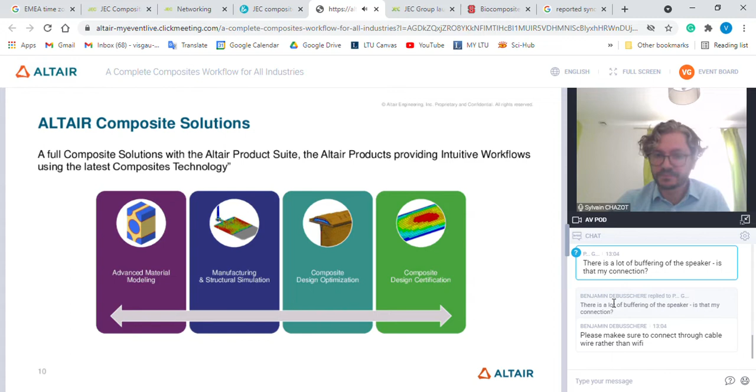We offer a full solution, and that will be detailed during the presentation of our VP, just after my talk, to show you how we can help you to be more efficient in composite design and composite simulation. And finally, just before introducing the first speaker, we have our own full complete solution for composite design.

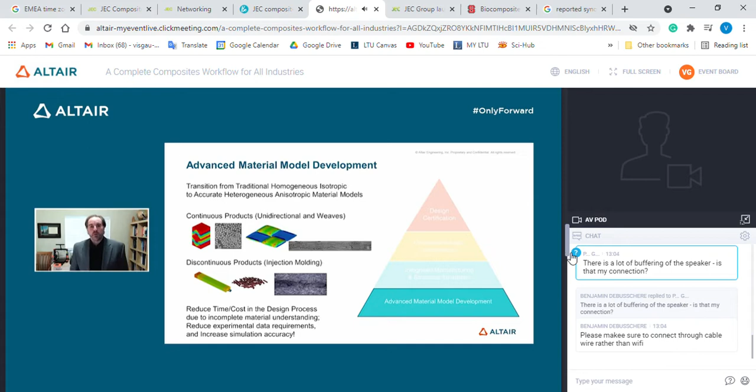So in the advanced material model development block, it's really all about transitioning from a homogeneous isotropic world to a heterogeneous anisotropic world, and really becoming as comfortable with heterogeneous anisotropic material models as we are with homogeneous isotropic material models. And we're focusing on three main product forms right now. In the continuous reinforced product world, mostly on unidirectional and woven product forms.

So within those two product forms, the unique capability is actually the ability to bridge the scales from the homogeneous ply level to the constituent fiber and matrix level, and the ability to do that computationally efficiently and to obtain results at the constituent fiber and matrix level such that we can obtain significantly more accurate material models.

Same thing in the discontinuous reinforced product world, which really is focusing on the reinforced injection molded material world, where we're doing the same thing, where we're describing the heterogeneous anisotropic nature of these materials, characterizing that heterogeneous anisotropic nature, and accurately and computationally efficiently developing material models to describe all of that for you.

So at the end of the day, it's all about reducing the time and cost in the design process due to incomplete material understanding, or not even incomplete, an inability to highly accurately model these materials, and bringing that to the forefront. It's also about reducing the amount of experimental data required to build these models, not necessarily bringing that to zero, but absolutely reducing what's required in order to develop these highly accurate material models. And of course, being able to increase simulation accuracy while we're doing all that and maintaining computational efficiency.

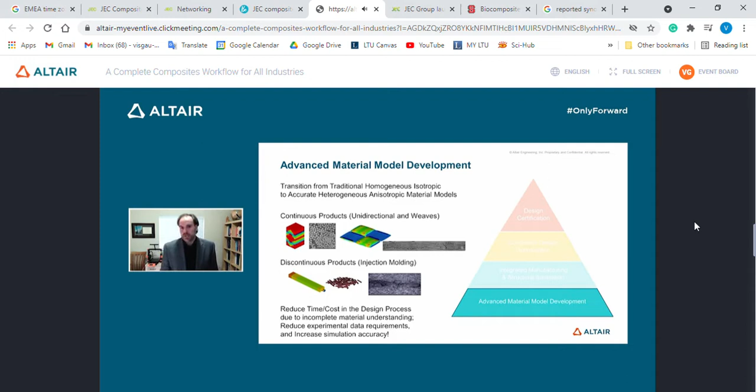The principal product that we're using inside of the advanced material model development block is what we call Altair Multiscale Designer. What's really unique about this product is that it allows for the exact same material models to be used within all commercial solvers, implicit and explicit solvers included. And of course, it's very tightly integrated into our own solvers, OptiStruct and Radioss.

But the exact same material models are also available in other commercially available solvers out there. It is indeed exactly the same material model and exactly the same code. We are using that through the user material capabilities of all of the codes, which is quite a nice thing to be able to do.

When we're talking about integrated manufacturing and structural simulation, again, it's all about being able to efficiently build these structural simulation models while we're bringing information from the manufacturing simulation into that structural simulation in order to improve our predictive accuracy of these structural simulation models. Three main areas that we're focused on. So in the area of traditional or automated layup and infusion methods, we're working on integrating draping simulations for obtaining fiber orientations and/or residuals into the structural simulation very quickly and efficiently.

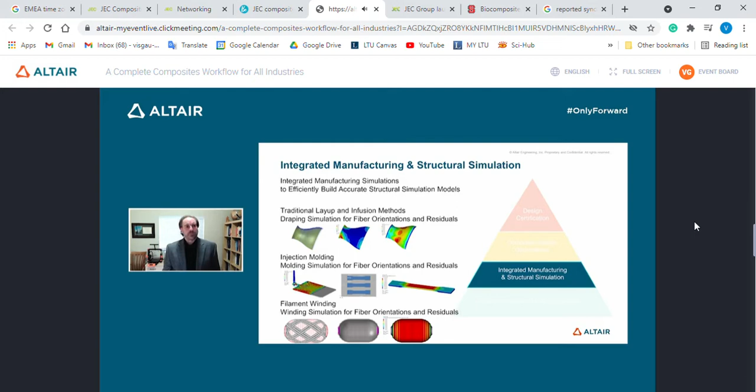A good example of a complete workflow in the integrated manufacturing and structural simulation world is the Altair injection molding solution workflow. It involves three main pieces. So we have just released Inspire Mold, which is a fantastic molding simulation product. It allows you to do your fill, your pack, and your cool simulations. In addition to all that, you can get your fiber orientations after you do a filling simulation.

Multiscale Designer is used in concert with the molding simulation to develop a heterogeneous anisotropic material model for that particular reinforced injection molded material. And then we bring both of those pieces of information together into the pre- and post-processing world, which is HyperMesh and HyperView.

HyperMesh, where we build the structural simulation model, HyperView, where we're post processing that particular structural simulation model, and of course we're using OptiStruct in order to perform the solution, whether it's a solution of a warping simulation or whether it's a strength simulation, including warp residuals in that strength simulation for ultimate load carrying capability.

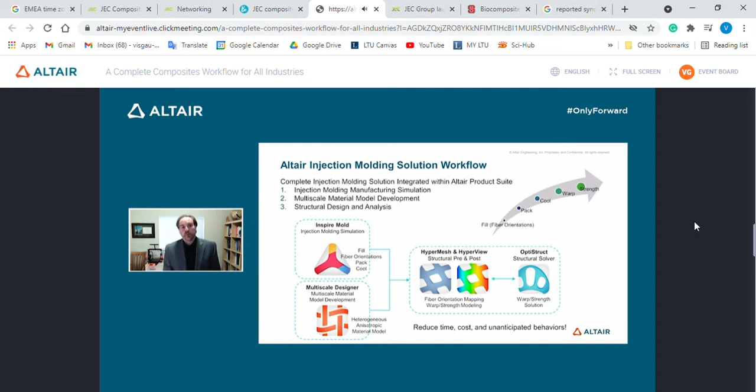So it is quite an advanced, wholly contained... I think what's really unique about this particular solution workflow is that it's wholly contained all the way from the beginning to the end within the Altair product suite. Really solving the interoperability problem that you might have to go through if you were going to a la carte the pieces of this together from other commercially available offerings. Okay.

Going into composite design optimization. So again, using traditional capabilities in the concept design optimization world, namely topology optimization, which is going to give us in the composite design optimization world our part shape. We're using that exact same technology to really tell us what should the part shape be. But we need to go a little further with composites.

So once we know that we have a certain part shape, we can make up that part shape with any number of composite plies in any number of orientations and thicknesses that we need. And so we've extended our optimization capabilities into two primary technologies. The first one in the composite concept design optimization world, which is called composite free size optimization. And that technology is really focused on trying to describe what are the most efficient ply shapes.

You're going to see here I have a slide that shows that, just like topology is synthesizing a structure, we're actually synthesizing ply shapes that make up that structure with that particular concept design optimization technology. Once you've kind of interpreted your concepts, then we can get into the detailed composite design optimization phase. And there we're talking about a technology called composite size and shape optimization. It's equivalent to the size and shape optimization. We just put the word composite on front because we're talking about sizing ply shapes now.

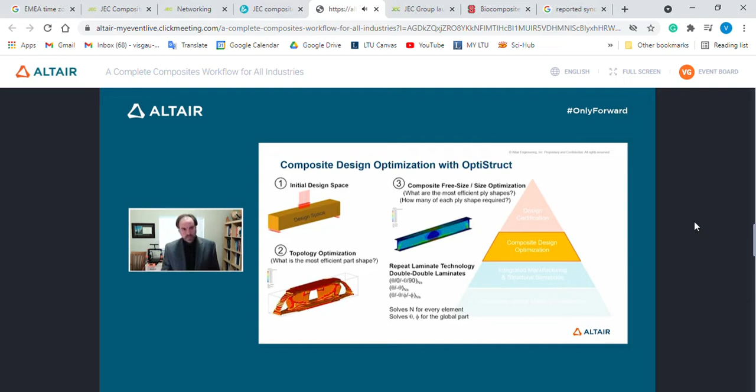Hopefully I can show you the image here where the real unique aspect of the composite design optimization technologies that we're bringing to the commercial world is the ability to synthesize these ply shapes. Shapes that you might not have intuitively thought to make before, but absolutely are valid and can be made. You can see some examples of some ply shapes here that, again, might not be super intuitive, but absolutely are reasonable and practical to be able to manufacture.

So while we're synthesizing these ply shapes, we're also optimizing the ply angles and the ply thicknesses. And really, we're providing a modern, robust composite design methodology that is quite different than traditional design methodologies in the world of composites.

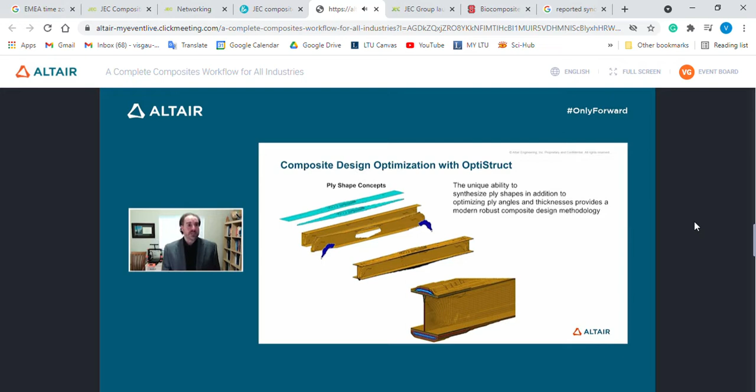So last but not least, in our development block of design certification, it's all about integrating composite stress toolboxes into a finite element architecture world. And that's always been kind of the outstanding item of these stress toolboxes, which exist in numbers across many companies, is really interoperating with the finite element information. And so we have a unique opportunity in Altair since we acquired ESAComp, which is a fantastic composite stress toolbox that came out of ESA in Europe, the European Space Agency.

And what we're working on is really providing an integrated version of that technology inside the HyperWorks framework. And so really solving the interoperability problem, the exchanging of information between your finite element models and your traditional composite sizing calculations or certification calculations in order to really reduce the pain point there. So that's all about FEA Integrated Stress Toolbox.

It is going to provide capabilities for composite beams, panels, bonded and bolted joints for both design and analysis. It can handle linear static, nonlinear, buckling, first ply failure, even progressive failure of laminated structures. And it's quite exciting to see this technology come in.

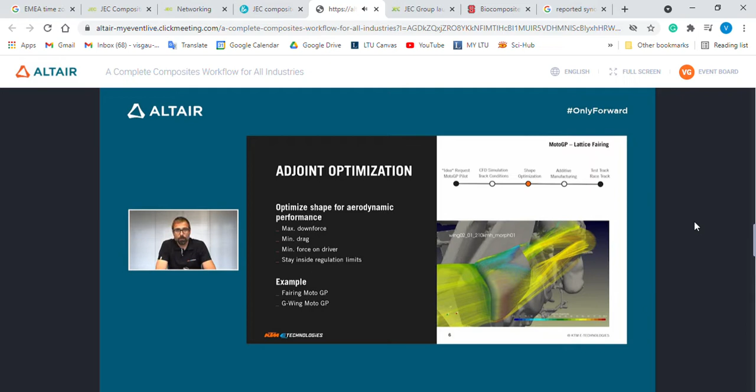In order to be quick on a test track, we need some appropriate manufacturing techniques. We think that additive manufacturing in combination with simulation is a very good tool to do so. And here we need especially simulation topics to define the back structure below our aerodynamic surfaces, to give the part enough stiffness that it will not deform during the ride. And here, as you can see on the slide, we developed lattice structures that differ in the lattice itself, the density of the mesh, and also the size of the structure.

To summarize this whole process, with the combination of ALTAIR simulation tools and appropriate manufacturing techniques, we are able to really quickly get from an idea of improvement to a part that can be tested on the track. We can tailor it to the needs of the driver, and we even can do different parts for every single driver without major additional effort.

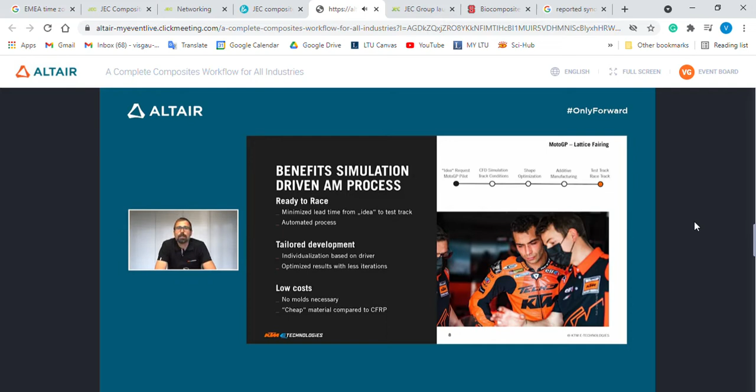And what is also a very good part of it is that compared to conventional CFRP solutions or the approach here, we do not need, for example, molds, and also we do not need the expensive CFRP material. And so the whole process is not just faster than CFRP, but also a lot cheaper. The next case study I want to present is the development of a vehicle frame within a new urban concept.

This new urban concept or the platform is called Emotion. Emotion is a research project where the goal is to develop a cost-effective, energy-efficient and comfortable new light electric vehicle platform, especially tailored for young and older generation, where the platform provides the possibility to place vehicles in different categories, for example, the L1 and the L3 category.

Mass targets, energy densities for the battery, efficiency targets, and there is a strong connection or an influence from one target to the other. For example, the mass is influenced by the battery size. The battery size influences the range. The structure is influenced, etc., and therefore multidisciplinary optimization methods are necessary in order to find a global optimum. To do so, we went through different steps.

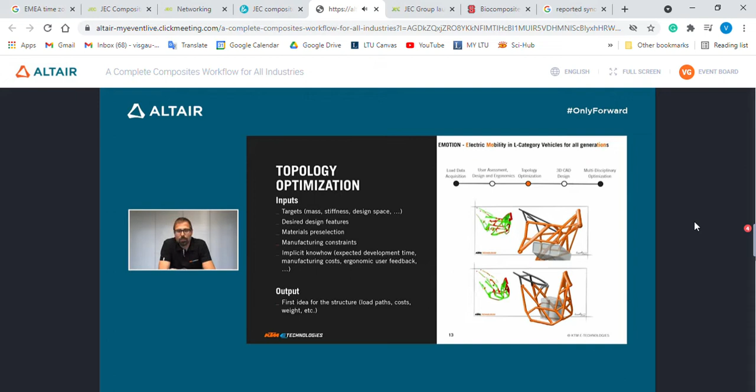In the next step, we set up step by step a 3D CAD model for the main structure, where we also used simulation techniques for the development or the detailing of this structure. So here we set up a SimSolid model, which is a meshless simulation technique that is more or less real time. And so we were able to support CAD engineers with important decisions.

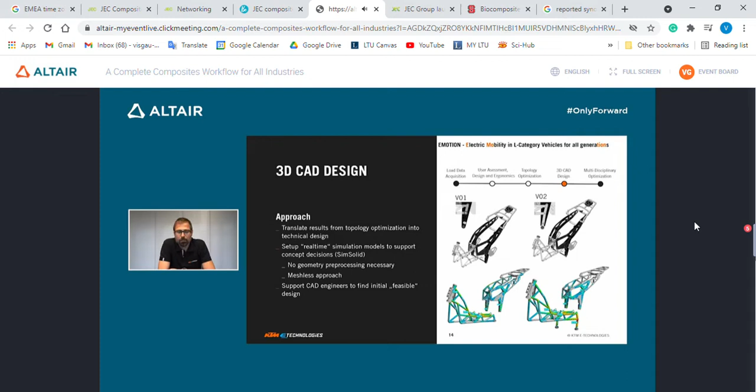And then on the bottom, you can see the final CAD, or the simulation of the final CAD, which is then the starting point for further optimization, this multidisciplinary optimization, where we parameterized the structure, the wall thicknesses, positions of the pipes, materials, etc. And we combined them with economical targets, let's say costs, and also with the CO2 footprint to find a global optimum for our structure.

The project Emotion is going on at the moment. The development is also ongoing here, and the first prototypes will be set up by the end of this year. The last thing I want to focus on is a series part that we try to rethink by using simulation techniques. So this is what we call a new generation footrest. Here we took a standard off-the-shelf KTM footrest from the KTM Super Duke 1290R.

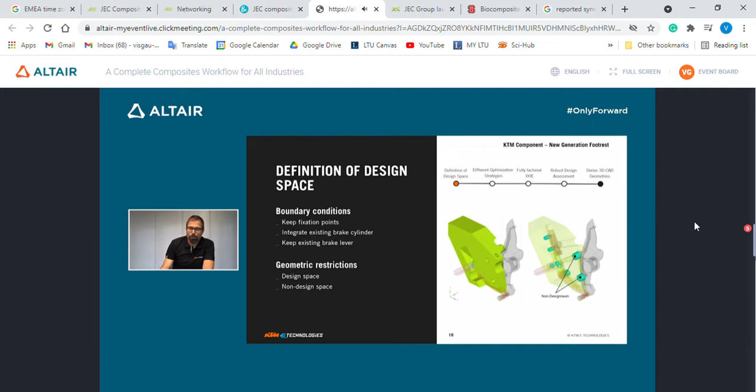Here in this case study, I want to focus a little bit more in depth on the simulation approach. You can see here on the slide two different pictures. On the left hand side you can see the design space we defined. We want to develop mainly the footrest main plate, and on the right hand side you can see some non-design spaces where we want to keep the fixation points as they are, and also integrate the existing components into the optimization.

We went in 3 steps here, and we tried to also then compare those 3 different complex optimization strategies. The first strategy is, let's say, a standard optimization with nominal values, which then results in a first design proposal. The next step is to include scattering and to define a design of experiments, where we then get out some different designs with scattered loads, for example, or scattered material parameters. And then we combined all these outputs in order to generate a second possible design.

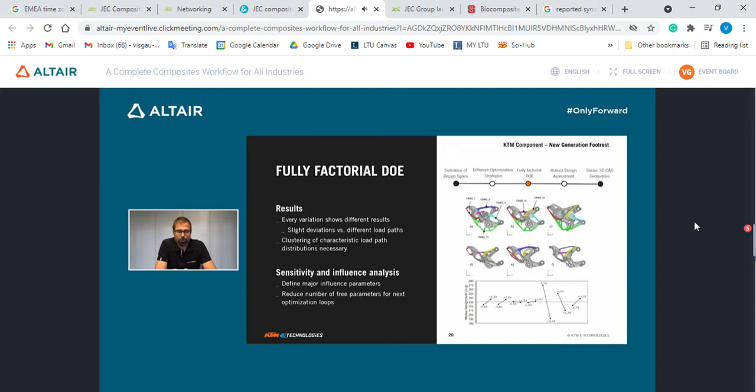And we have now 2 different ways of generating 3D data out of it. There is the direct 3D generation, where we can either use surface data directly by post-processing in HyperMesh, or we can use faceted data. Then we have to go through some kind of smoothing algorithm or geometric wrap to come to the CAD data. Or we go an indirect way where we export the faceted data into a CAD program, CATIA for example, and then set up a generic parametric CAD model, where we are then also able to simplify the structure a little bit and also include some other inputs.

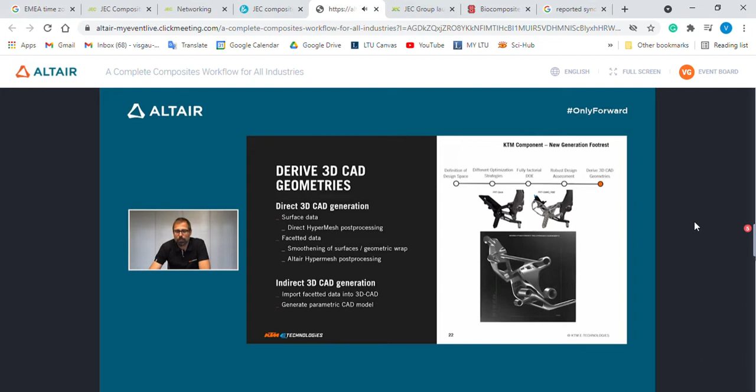On the bottom picture of the right side, there is an interpretation of our design company Kiska based on the results of the topology optimization. To conclude my talk, I hope I gave you a short insight into different simulation topics, into different ways we're using the Altair simulation portfolio.

For us at KTM Technologies, it's very important that we have fast and reliable simulation processes, and we try to use them at a very early stage in development to overcome uncertainties and to already use facts for the decision of the way forward. And what we also include very early is not only technical issues, but also costs or some kind of engineering complexity and implicit user know-how.

For equipment setting up on the car body, we have the possibility to apply the CATIA modules for a simple approach. But when the modeling is too complex, the action is the same as for the car body structures. On the figures, you can see the establishment of a technical rack in a TGV power car with the simplified model for the rack and the calculation of the support and the fixings.

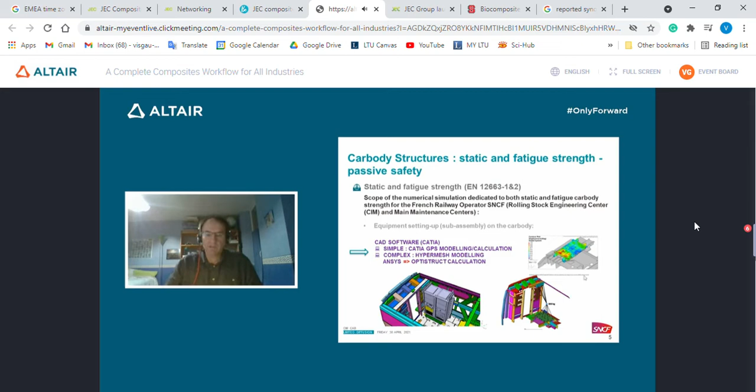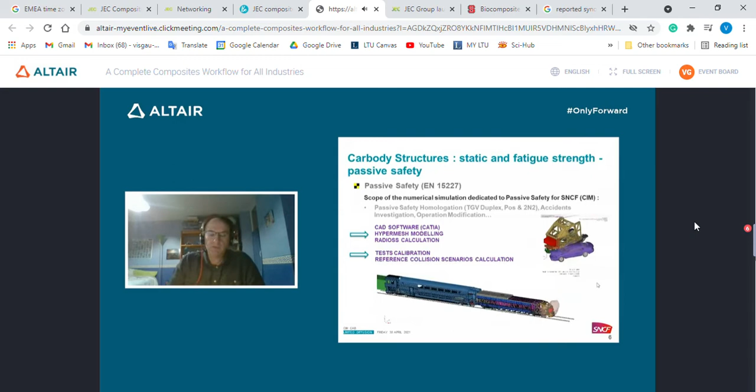For passive safety, we applied Radioss software since the 90s with a proven combined method using tests, calibration of the tests, and numerical simulation of the reference scenarios. This method is well described in the 15227 standard. We have specific applications like animal impact studies with severe consequences on our trains and the need to protect our antenna and other safety equipment. On the figures, you can see the protection of 4 braking systems.

Also, biomechanics is well developed in the automotive industry and in railway for the States or UK, for example. Further efforts need to be made to require biomechanical studies for new rolling stock, mainly for abdominal impacts, with the necessary development of adapted tools and criteria.

Hi everyone, I will present the design of composite parts on use cases. The first challenge for the design of composites is to make consistency tests on calculations. When it is done, we compare non-linear and linear calculation to know if linear calculation with OptiStruct is conservative or not. When we are confident with the calculations, it is possible to design or redesign composites, especially when you have negative feedback of composite behavior during commercial service and it is not possible to modify the part. We will see an example further.

Also, when there is negative feedback with a composite part, but it is possible to modify it, it is necessary to design the modified part and quantify the associated gain. In the end, designing structural composite parts allows us to control the design work done by train manufacturers and homologate new generations of trains with composite structural parts.

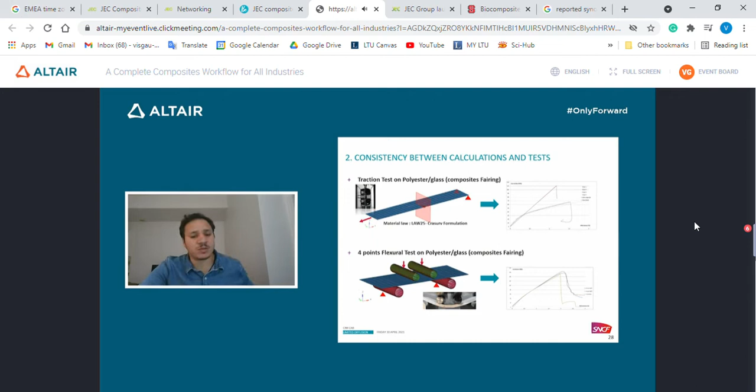The same was done with the 4-point flexural test. Then we wanted to know if with OptiStruct calculation we can obtain conservative results compared to non-linear calculation with Radioss. We also want calculation as quick as possible. For that, we use a bogie hatch used in a regional train, as we can see here. Its localization is close to the bogie. We put in the calculation a 200 Pascal pressure, the maximal pressure seen by this train.

It is put on the external surface, as we can see here, and we use two types of material cards for the ply, mat and taffeta. The composite is made of 2-point inserts and 1 lock point below. The result of the comparison is shown in this slide.

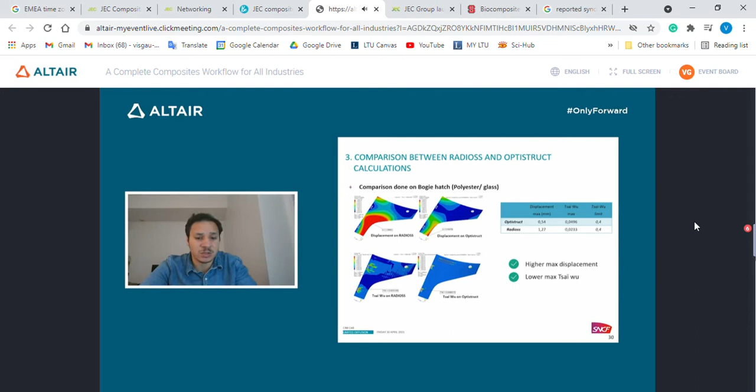As we can see, concerning the displacement, it is different because of the decrease of mechanical characteristics with non-linear behavior of the composite compared to the linear calculation with OptiStruct. It introduces more flexibility. However, the Tsai-Wu index in the OptiStruct calculation is above the Tsai-Wu index of the Radioss calculation. We can conclude that using OptiStruct is okay and faster than Radioss.

Now I will show you a different example of negative feedback. For the suburban train from Siemens, we had some problems because the part was done by pultrusion process. As we can see, the hatch is maintained by a composite slide in red, but some cracks appeared, as we can see here. The pultrusion process with only one fiber direction is not adapted to the direction of the solicitation.

Another example with negative feedback is air conditioning hatches, as we can see here. We had some unwanted hatch opening during commercial service. There is too much flexibility and no quantification of effort in the insert. We saw the necessity to modify the air conditioning hatches and estimate again further.

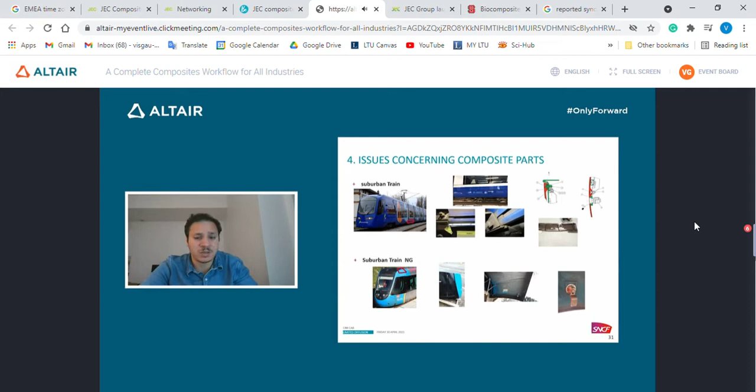As we are confident with the parameters, it is easily possible to design composites on the next new generation of suburban trains, for example. We modified it by introducing foam in this place to improve the stiffness of the hatches. We also added over-lamination on the foam or on the insert, in yellow. The aim was to reduce the displacement when the part is under aerodynamic pressure.

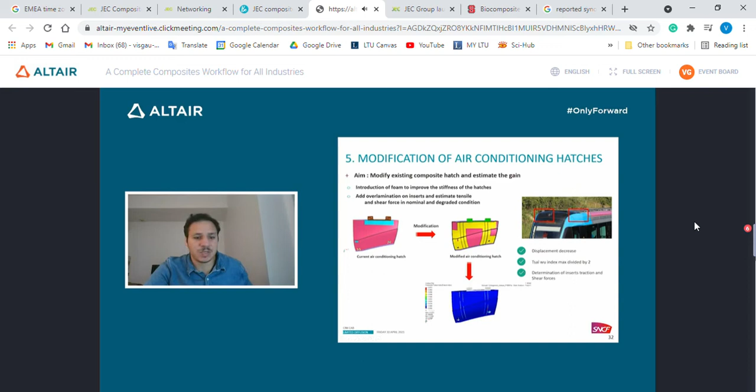Also to reduce the Tsai-Wu index and, at the end, estimate the traction and shear force on the insert, not done by manufacturers. At the end, all is okay: displacement, Tsai-Wu index and force. For another suburban train, as we can see here, it was necessary to redesign all the parts. So we decided to create a new geometry, a new insert, and estimate the Tsai-Wu index and force in the insert.

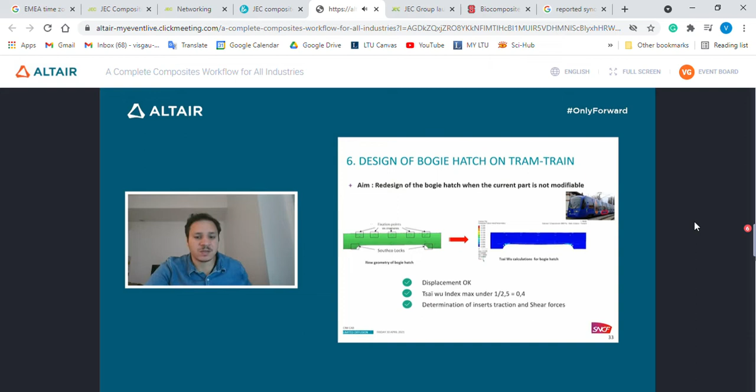Everything is okay. Also, for the structural part, we participate in the Shift2Rail PIVOT project, which consists in developing the conceptual design of the different demonstrators to be performed together with all related manufacturing activities needed to build the physical specimen. For us, designing composites permits us to know the necessary and sufficient elements to homologate structural composite parts in a train in the future, and to be able to maintain a composite structure during its entire life.

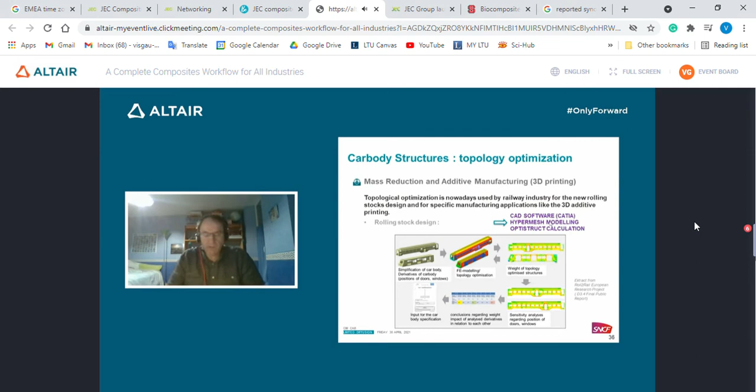As for the static and fatigue approach, we use the CATIA software for the CAD model, then HyperMesh to prepare the model, and OptiStruct for calculation. Topological optimization is particularly well adapted to composite structures, with the well-known sentence, the right material in the right location. If you look at the screen, you can see the distribution of the necessary fiber orientation along the car body structures. You can see where longitudinal fibers are necessary, vertical, transversal, and diagonal directions, but also where a classic isotropic material is more appropriate, like with the blue color.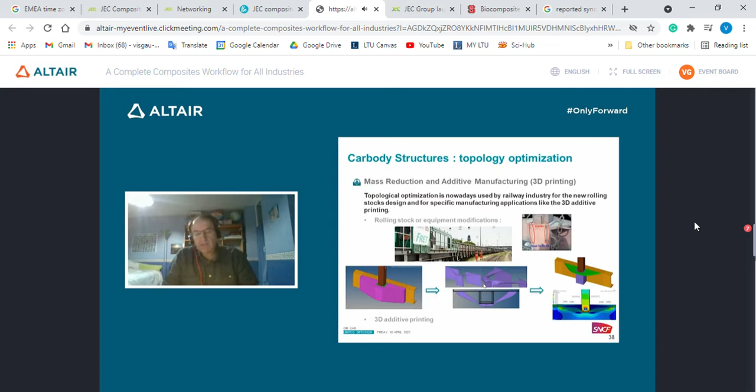We cannot show our latest elements manufactured with 3D additive printing for existing trains and future rolling stock, but structural elements were tested in the laboratory and are being tested now in operation on our trains. This new method allows the use of stronger, more expensive materials than the classic ones, thanks to the base material reduction.

As a conclusion, virtual homologation is now broadly applied and mastered for car body structure design in the railway domain for static, fatigue, and passive safety analysis using the HyperWorks tools. Nevertheless, improvements are necessary for bolted assembly design, composite designs, and also biomechanical studies. For the future, it will be necessary to master topological optimization and to numerically combine the track and rolling stock interaction. Thank you for your attention.

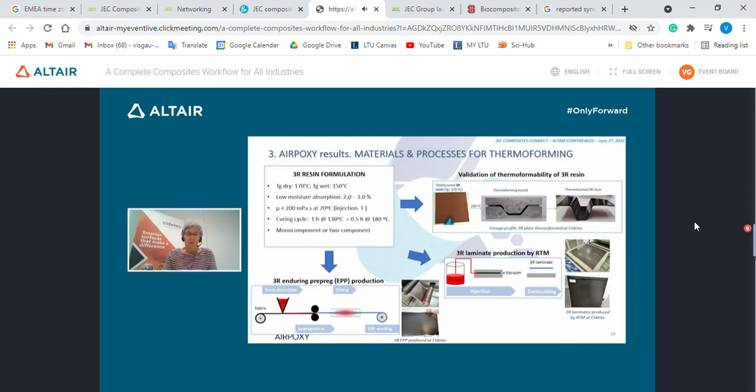Once the materials were produced, the next step was to study different thermoforming strategies for the laminates and enduring prepregs produced with the 3R resin. For that, 3 different strategies were defined. The first strategy consists of thermoforming the fully cured 3R laminates in a discontinuous process, in a similar way to thermoplastic organosheets. The second strategy consists of thermoforming a stack of enduring prepreg in a discontinuous process. During this process, the plies are consolidated and thermoformed at the same time.

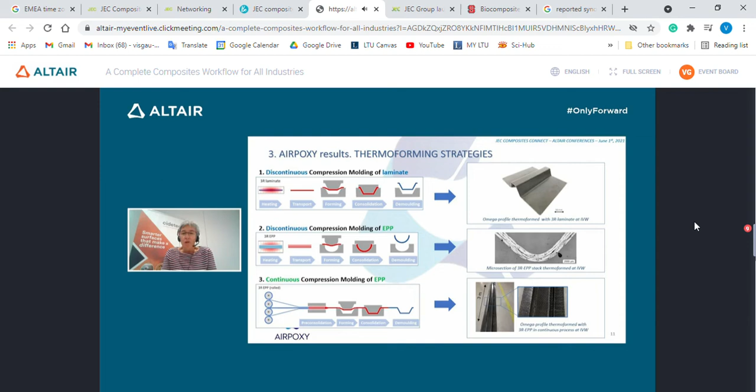And the third strategy consists of thermoforming the enduring prepregs, but in this case, in a continuous process. In the first stage, the plies are pre-consolidated, and in the second stage, they are thermoformed, but the process is continuous. This option is suitable for the production of geometries with symmetrical sections like omega profiles. The image shows the proof of concept obtained by IVW during the development of the three strategies. I must say that at this moment, the two discontinuous processes are practically fixed, but the continuous process is being optimized.

In parallel, the thermoforming simulation tool was developed, and for that, two main research axes were developed. The first one is the ply-ply interaction modeling, which is a crucial tool to predict defects because local wrinkles or decohesion can be predicted only if the interface behavior is simulated. It was proved that the cohesive element approach is able to capture the behavior of the 3R resin.

In the case of the second modeling, the 3R laminates behavior, a new material model was implemented that on the one hand can capture the material anisotropy during the forming process and on the other hand can simulate the nonlinear elastic behavior of the fibers and the contribution of the isotropic resin. For that, two different resin models were developed, one considering the resin as a viscoelastic material and the other as an elastoplastic material. In both cases, it was confirmed that the models can capture the material behavior at different temperatures and strain rates.

The material was calibrated using tensile, bending and in-plane shear tests, and the models were tested on structural scale models such as semi-spherocylinder and hemispherical models that you can see in the pictures. A good agreement with real parts was obtained, and it was possible to predict with accuracy the final shape, type, and location of defects like wrinkles and delaminations.

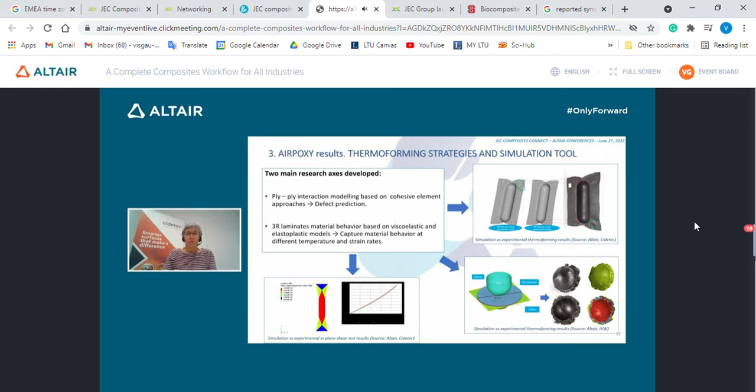Next, the models were adapted to simulate the two elements that will be produced by thermoforming, the longitudinal stiffener of the fan cowl demonstrator and the webs of the leading edge demonstrator. In the case of the webs, several material and process options were studied in order to define the parameters that better avoid wrinkles and delaminations.

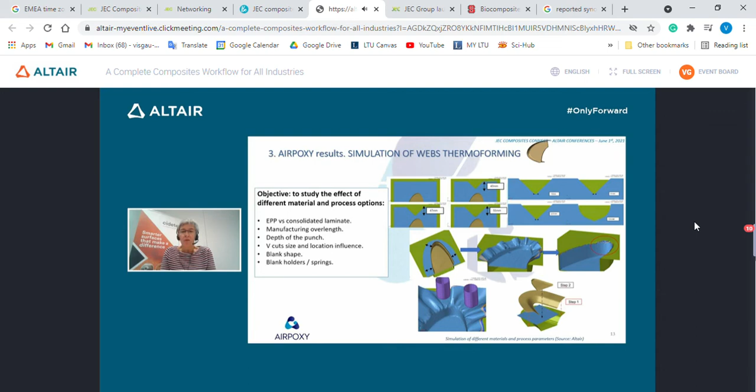Based on the results obtained, the type, geometry, and holding system of the blank were defined. The best results were obtained with a punch in 2 steps, combined with a V-shaped cut, the depth without wrinkles being 10 millimeters. It was observed that the springs were not a good option, as they add much complexity without significantly improving the quality.

In the case of the longitudinal stiffener, it was designed with an omega shape in order to increase the torsional stiffness of the structure. A little pan down was included, and the head was reinforced in order to carry the main tension and compression loads. Both geometries are usual in this type of stiffener.

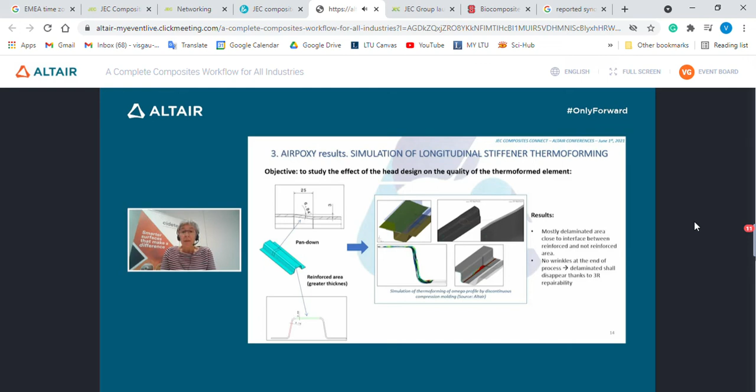The simulation tool was used to study the influence of the pan down and variable thickness on the quality of the thermoformed longitudinal stiffener. It was observed that mostly delaminated areas appear close to the interface between reinforced and not reinforced areas, but no wrinkles are expected at the end of the process, as the delamination shall disappear thanks to the repair capability of the 3R resin.

Finally, the conclusions. So far, we can conclude that two numerical tools have been developed for the thermoforming of 3R laminates: the ply-ply interaction modeling based on a cohesive element approach, and the 3R laminates material behavior based on viscoelastic and elastoplastic approaches. The models have been tested on structural scale models, and all of them show a good agreement between numerical simulation and test results.

The models have been adapted to simulate the two elements to be thermoformed, the longitudinal stiffener and the webs. And finally, the thermoforming strategy for the webs and head design for the longitudinal stiffener have been defined and confirmed according to the simulation results.

The next steps are the production of demonstrators to validate the simulation results. At this moment, the molds are being produced, and we expect to have the first demonstrators produced by the end of this year. And this is all.